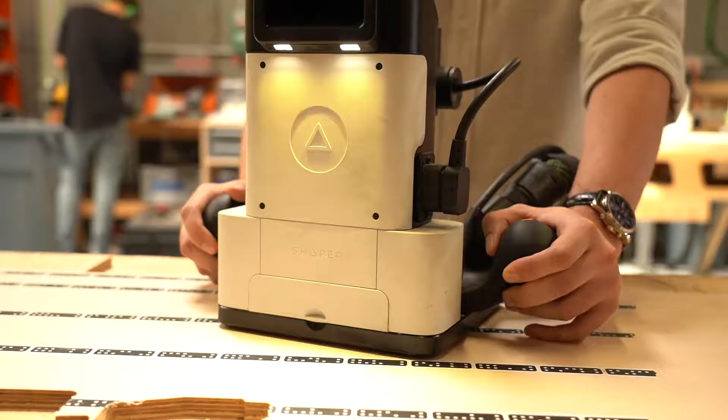Shaper is a human-involved robotics company, so we're trying to use computer vision and robotics technology and other modern technologies to bring the power tool industry up to date and beyond. So Shaper Origin is our first product and our first foray into making products that enable people to do crazy things, making stuff that they just couldn't do before.

And then the last piece of the puzzle here is Shaper Tape. So Shaper Tape, which comes in this roll like this that we manufacture, this is how you augment your workpiece, how Origin knows how to track where you are in 3D space. So this is designed to be cheap, disposable, easy to apply, and easy to come off.

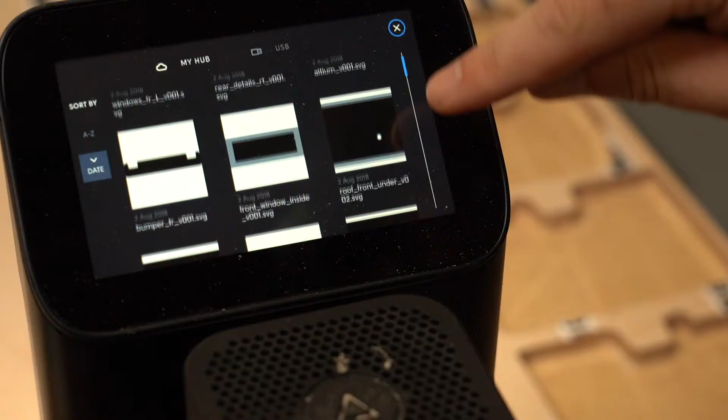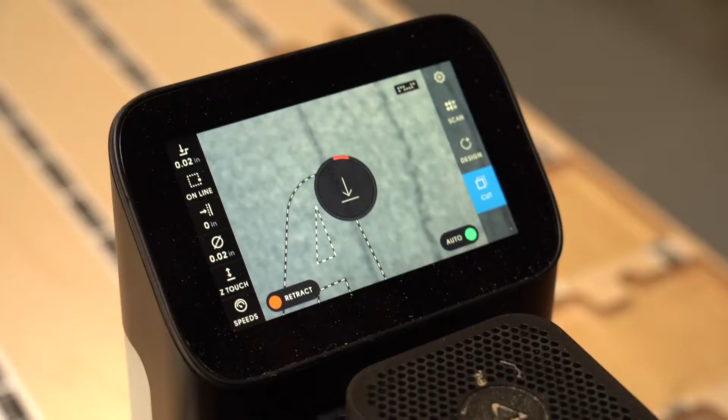Origin knows exactly where it is in 3D space, so you can augment your design files virtually onto your workspace. And then from there, it's basically like playing a video game that Origin lets you control. On Origin's capacitive touchscreen, you follow the lines, you try to stay as close as possible to the thing that you're cutting. And Origin has a real-time correction system. It's like autocorrect for your hands.

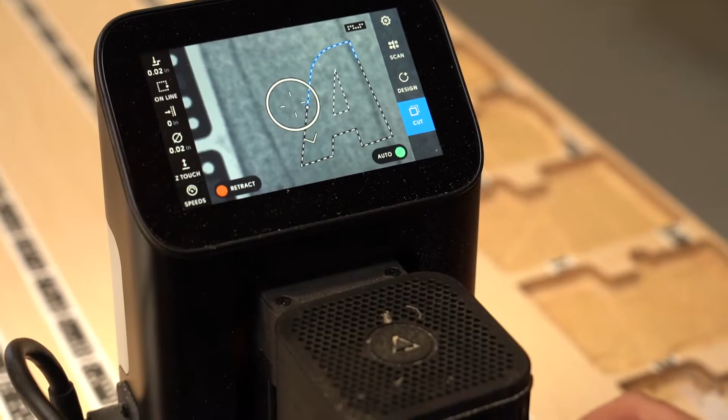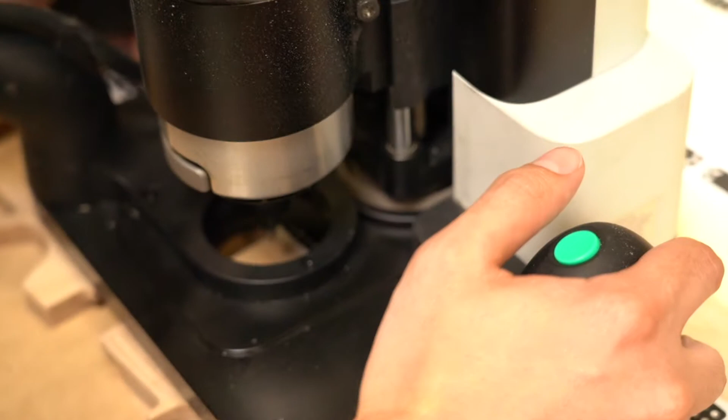So you do the rough movements, and then Origin does the fine adjustments for you, adjusting many hundreds of times per second to make sure that you're following your cutting path exactly, even if you don't have the world's most steady hands. So you get a cut that is perfect, despite you, as a human, not being perfect.

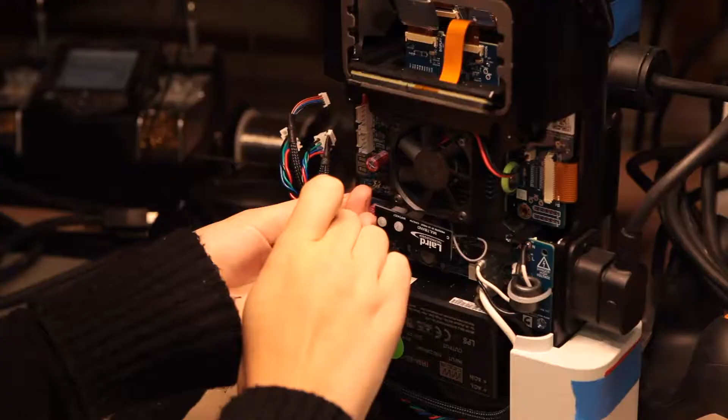One of the cool things about Origin is that all of the parts have to work together in perfect harmony from both a software, electrical, and mechanical standpoint. And if either one of those doesn't work as it's intended, then the entire product won't function properly.

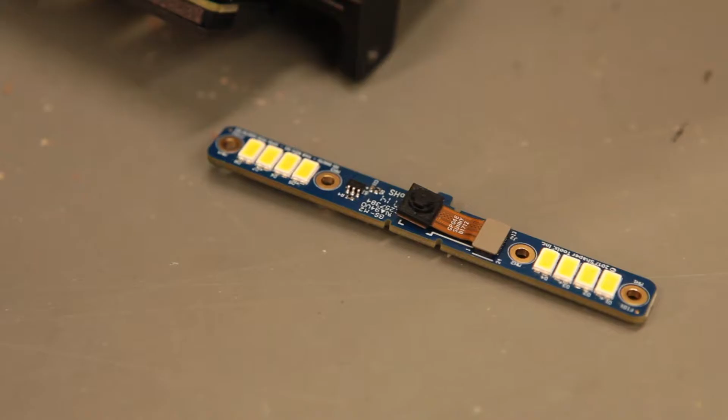Within Origin, there's multiple PCBs, all of them mounted in different planes and at different angles, just because of the complexity of the product. There's 10 rigid circuit boards in there and 3 flexes. And to connect all those things and do so in a cohesive way that A, is manufacturable, and B, allows us to meet the goals of the compactness and robustness for the product was very challenging.

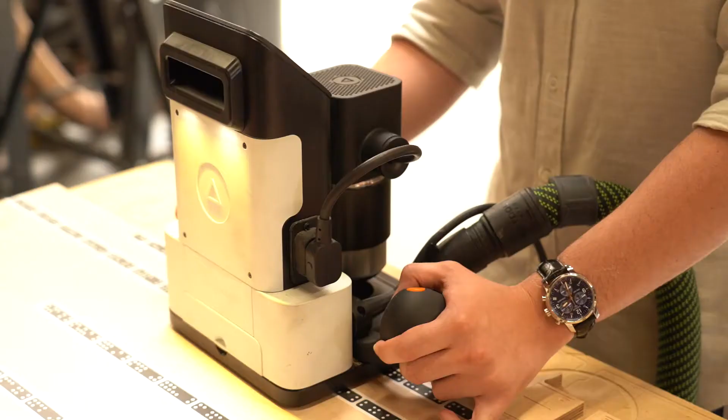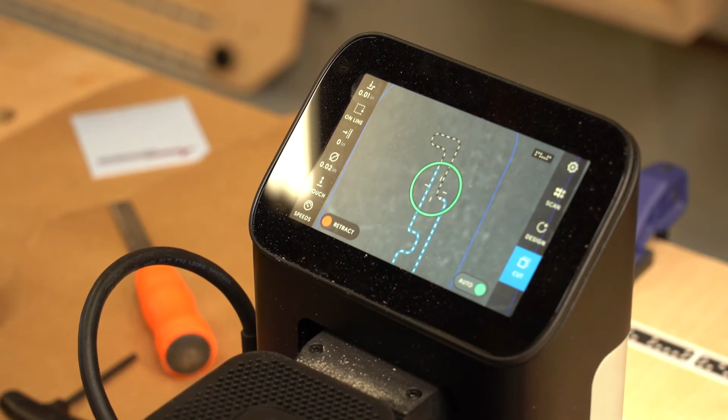People have these ideas, these things they want to do, these things they want to make. Shaper as a company is about enabling people to do those things. Use any 2D or 3D program you want, and you can generate an output that Origin can use to make something.